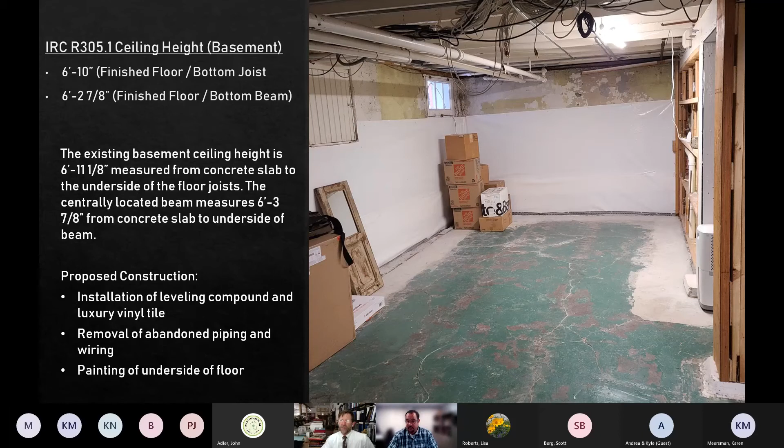One of the things we are going to do is remove as much of the abandoned pipework and wiring as possible and push all of that up into the floor cavity, opening up that space and making it usable. Then we would be painting the underside of the floor, so we would not be installing any finish on that ceiling, just to keep the maximum amount of clear height we can.

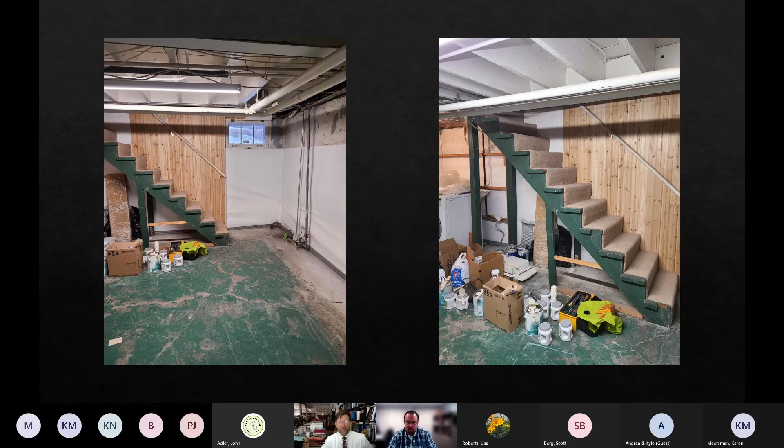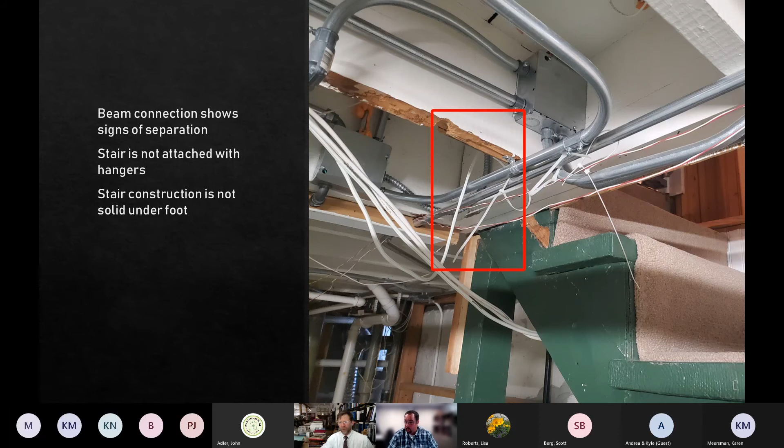This is the existing stair as it currently exists. As you can see, there's no guardrail on it. It's been pieced together - I don't believe it's original to the house, but I can't say exactly when it was constructed, though it has been tweaked and added onto throughout the years. In my survey, I noticed that the structural member that supports the wall above has actually started separating over time from a perpendicular structural member. So that is one of the reasons why I'm proposing that we'd like to get this stair out and reconstruct it. And it ties into the width of the existing staircase, which we'll look at.

As you can note from the floor plans, this stair is pushed right up against the foundation wall, and it doesn't leave us a lot of flexibility to move it. So one of the things we're looking at is the existing staircase at the point of that beam, which you can see here as well, that has paneling over it on this side. That measured...

2'6" within its current configuration. So what we're proposing to do is remove this beam and slide it over, so that we can assure it's installed correctly, and also free up a couple extra inches to get us closer to the minimum of 36 inches.

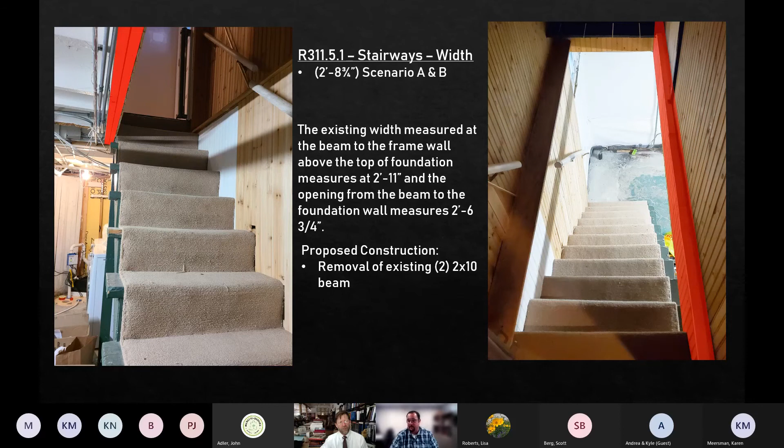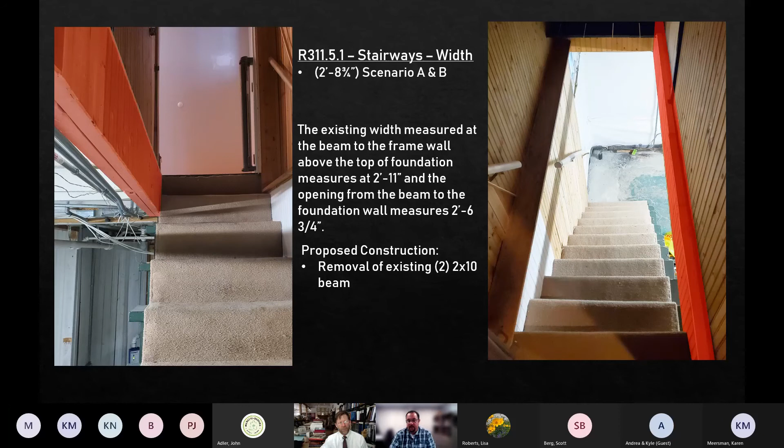Here on the left is an updated view looking up the staircase, and you can see that this is that beam here with paneling over it. We would be sliding that to the left, and based on my load calculations, I could replace it with 1.75" by 9.25" LVLs, sliding that over to get us a little bit extra room.

The request for relief on the energy code also comes into play at just this location. So we adhere 1/4" gypboard on the concrete wall. Our finished rough width would be 2'8¾". If we were to bring it to the 2018 energy code requirements, that would reduce that width to right around 2'5½". We looked at a combination of doing closed cell spray insulation so we can minimize the depth of the wall.

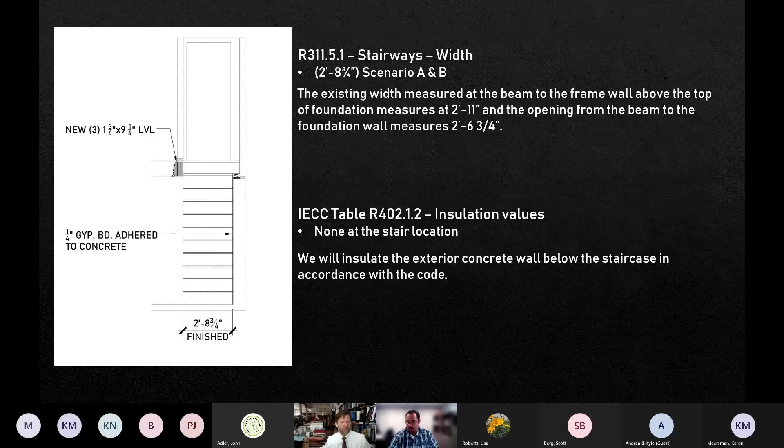But what we are looking for here is above the staircase to leave it as either exposed concrete or going with 1/4" drywall over it. Below the staircase, we would fur out the wall and insulate it to the current energy code requirements. And then all of the other exposed concrete walls would also be insulated to current code requirements.

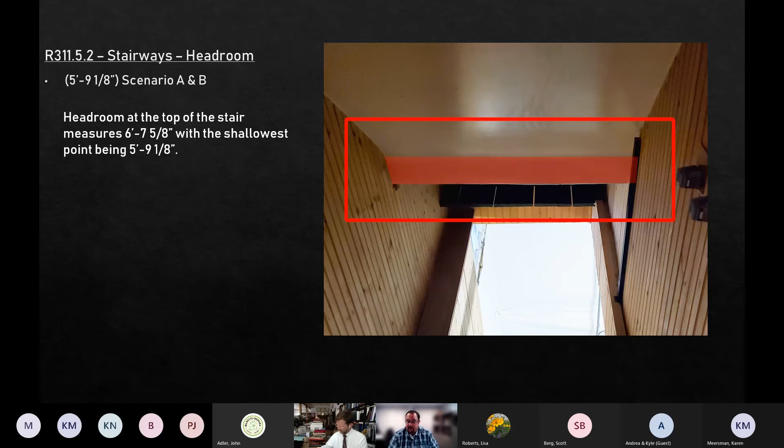Moving along, we're looking at the headroom here. There's this area, which I've got highlighted here, and it probably doesn't view very well, so I've highlighted it further. This is the underside of the stair landing above, and this enters into this staircase here. You can see a different angle of it below.

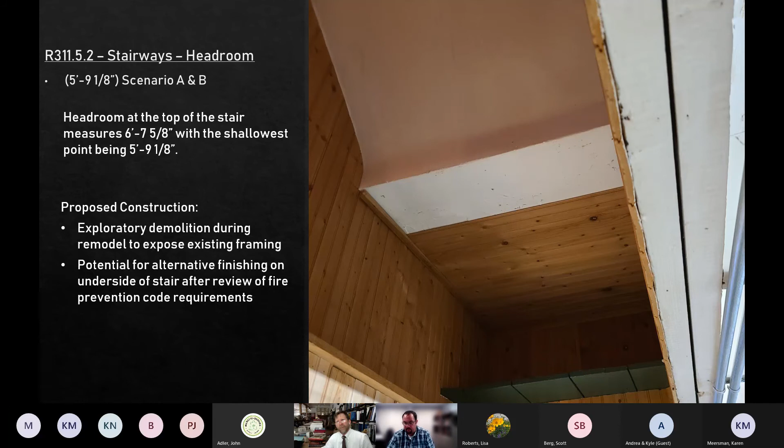On the right-hand side is that beam that we're going to be relocating. So in doing so, that allows us an opportunity to really do some exploratory demolition where we can remove all the finishes of the underside of the stair to see if there's anything we can do to minimize this intrusion into the headroom. Of course, once we see what we have to work with in demoing all of that, we would certainly look to see what requirements would be as far as the finished materials and closing off the underside of a staircase with the current required fire prevention requirements.

So here what I have, and I can go to an enlarged image of it after this if any of you require, is this area that is currently sticking out into the staircase. So as we look at it, even from the very top, the door is less than 6'8", which would be the required minimum clearance. And working our way down, the tread directly below is actually less than 6 foot.

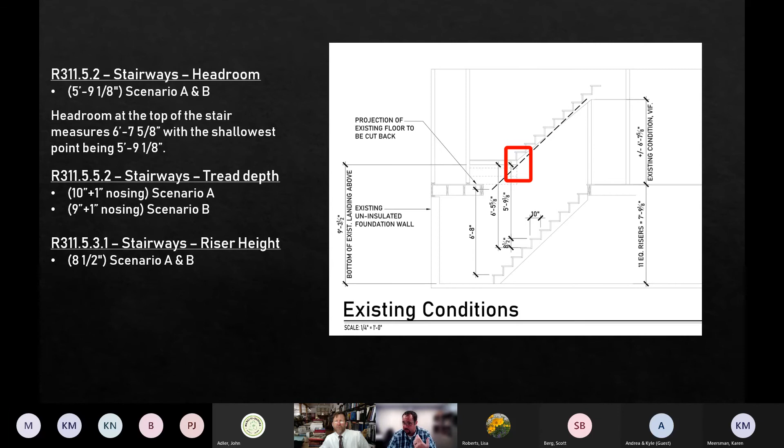So what we're looking to do is reconstruct the stair, and I've come up with a variety of different solutions that try to get it as close as we can, but because of all the existing construction above, it makes it very difficult, if not impossible, to meet the headroom requirements.

So one of the scenarios that gets us closer is doing a code compliant tread, but in all cases, the risers have to be 8.5 inches instead of 7 3/4. So each one is 3/4 of an inch over code minimums, or maximums rather.

So we have solution A, which is the only difference between this and the existing conditions is that we work in a code compliant tread. It does reduce a little bit of that headroom on a diagonal, but it's the closest that we can get.

And then the other solution is literally just replacing it in like kind, keeping everything as it is, doing a 9-inch tread in lieu of the 10, or 9 plus 1 for the nosing. This would be a 10-inch total, and then again an 8.5-inch riser.

And the landing of the staircase down in either scenario, even with furring out the existing wall, we can still be in conformance with 36 inches at the base of the stair. The landing at the top of the stair is less than 36 inches, but it backs up to a finished kitchen and would require us...

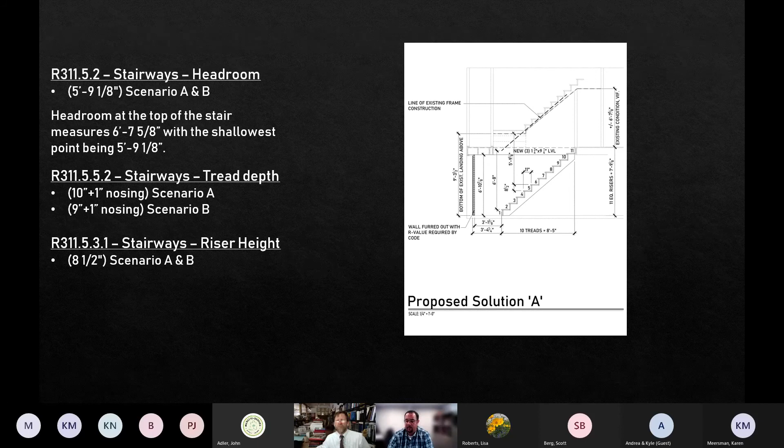So we've got, I'll give you back to an overview. The landing down here at the base of the stair will always be in conformance, even with furring out the wall for insulation purposes. But at the top of the stair, we have the finished kitchen, rear exit door, and then the top of the stair, which would require us to pull out this kitchen in order to make that work.

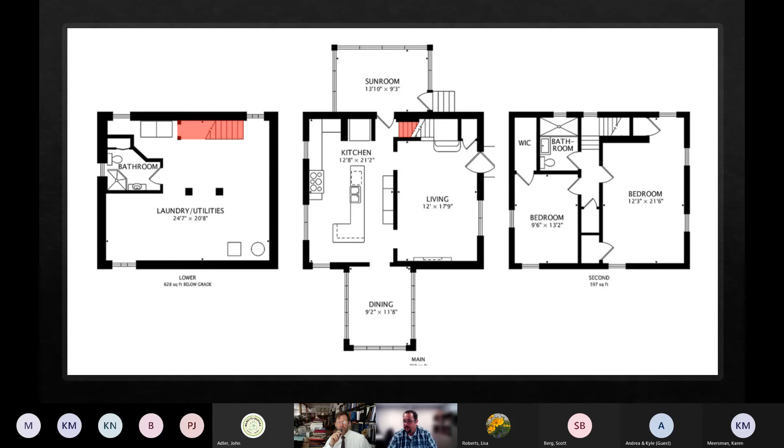So really, looking at the floor plan, we've been pushed into the bare minimums to work with. So we are seeking relief again on those items. And at that point, that concludes my part of the presentation, to turn it over to you and answer any questions that any of you may have.

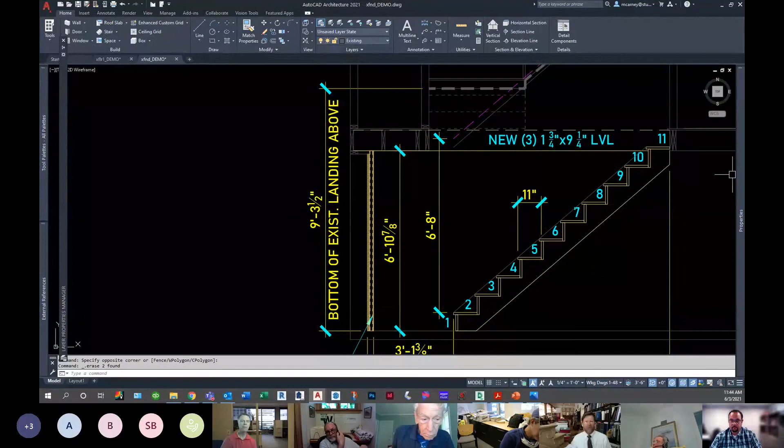But another thing, Mr. Liederbach, about how you were illustrating the underside of that stair: one of the things in this condition is that's actually the structural landing, the support for the landing upstairs. If I may, I'll quickly show my desktop again. By the way, when I was referring to the headroom, I was thinking of rebuilding in the same state because of the problems with increasing the tread width and reducing the height.

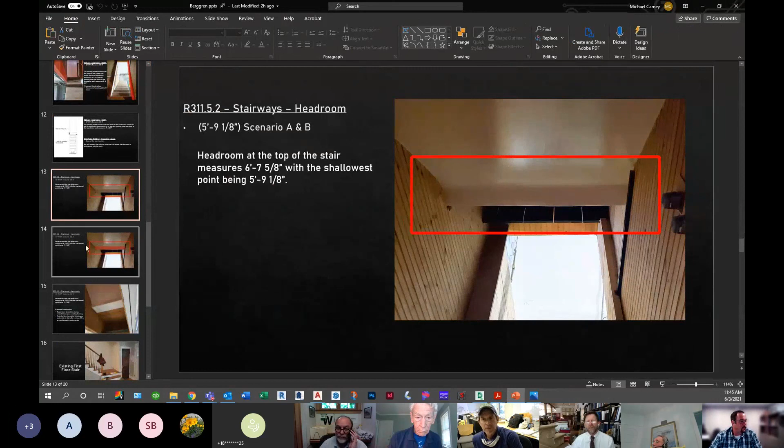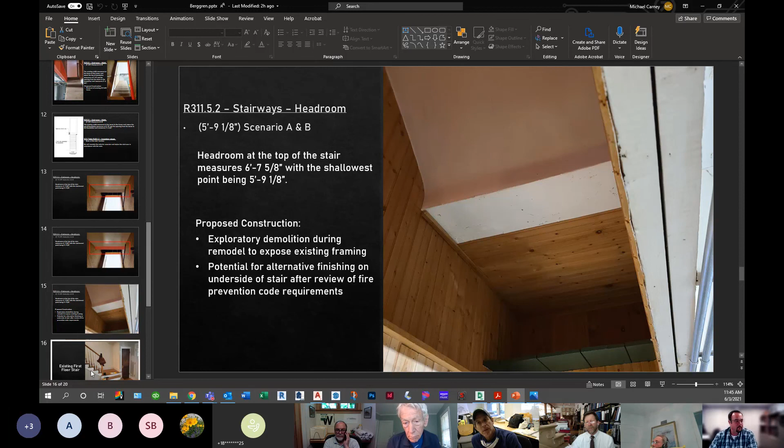So in that condition, if we're looking at the PowerPoint, this is the enlarged area where we have the underside of the stringers on the side, and the underside of that stair is finished. But when looking at the first floor stair going up, this is where I've located it. So it's supporting these stringers coming down onto this landing.

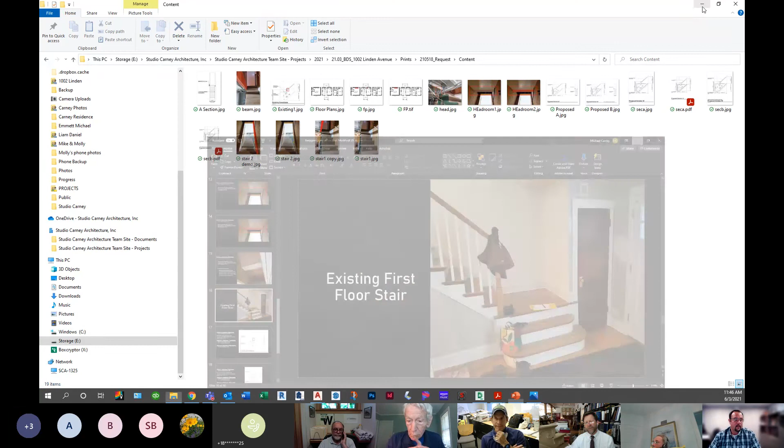So I definitely am fully supporting looking into pulling back the finishes and opening that up more, so that we can fully explore and give you guys an exact finished condition. But I will turn it over to Andrea and Kyle for their approval to tear apart their house.

I think I can just drill little holes with a little camera that lets you see things — there's a little snake camera that I've seen builders use. So I'd go easy on that. I do think when I look at that landing there's probably a structural component running north-south that there'd be a workaround for. I would look closely at that. And then I wouldn't rule out, it might be worth just exploring, the notion of...

You need to raise it a little higher. Sorry, Mike. There you go. There you go, Phil.

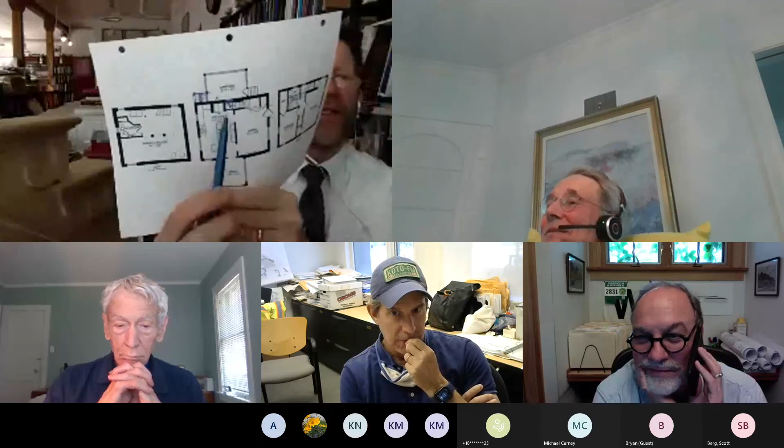I'm really low tech, but either... let's see, right hand, left hand. Either having this little opening, trying to create an opening in the galley kitchen, and some little add-on to the porch. Or the other question I had is, with that winder idea, what's the relationship of the first floor of the house to that porch elevation?

Is that porch at the same elevation as the first floor, or is it a step down? I believe it was pretty much level with the first floor, maybe a little bit below. It's slightly lower, maybe 3-4 inches. Okay, but not enough to get you what you need. It's not a full step, which would then give you the 4+ inches. Yeah, okay.

That's just trying to come up with ideas.

I first of all want to say thank you to all of you for your very careful attention to all this and your careful thoughtfulness about this. And I think we would be willing to do some of the investigation you're talking about to try to get an extra inch or two, as has been discussed. I think that's something we would be open to, if Bryan and Mike are willing to do it.

Yeah, absolutely. I think it's very reasonable to request that. I don't think it's very invasive, and if we can get actual final conditions, I think it'll benefit this whole conversation. So it's not just speculative.